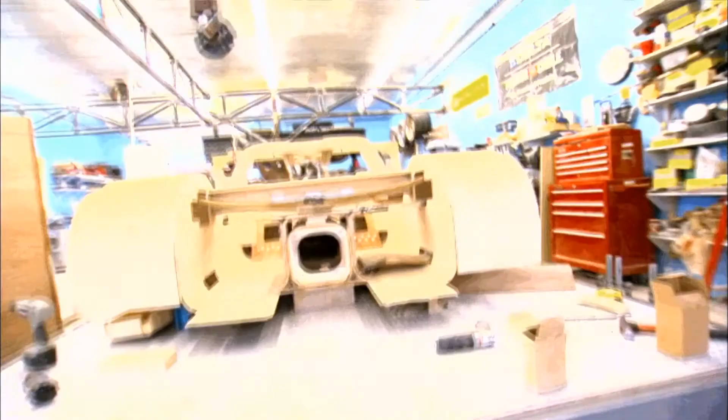In the future, you will commute to work at supersonic speeds, cruise around town in a mahogany sports car, and drive machines that will take you to new depths. Technology is pushing from every direction, getting faster with each passing second. Prepare yourself. The future is closer than you think.

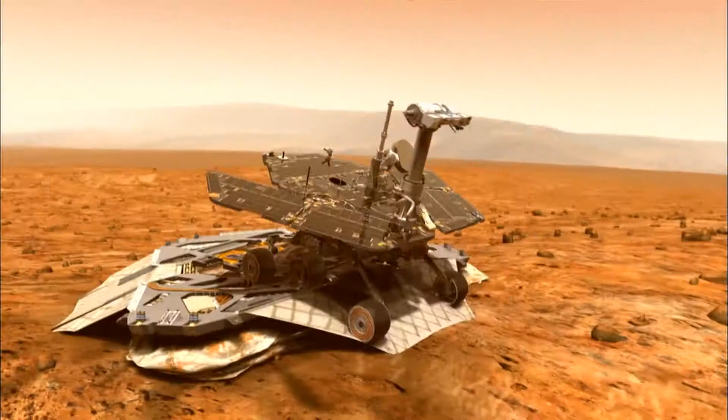The car hasn't really changed much in the past 80 years. It's basically a box on wheels. In the future, we're going to see a dramatic, revolutionary convergence of advanced technologies, nanotechnology, artificial intelligence, micro-sensor technology, the application of space age and digital technology, which will shake everything up concerning our car. Those revolutionary innovations will mean that cars will someday morph to suit our ever-changing needs.

Determining the shape of things to come begins with a simple question. Just what is a car anyway? Often referred to as the automobile. Automobile, like self-moving. With that definition, an elevator is automobile. I think a much better word, much more emotional one, is the word cars. If an automobile is what you use, a car is what you are.

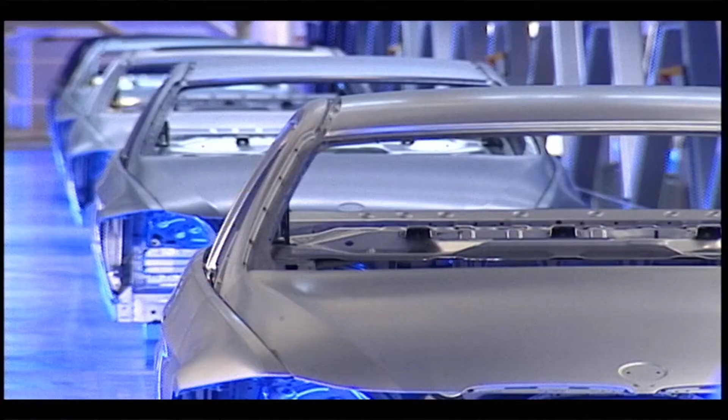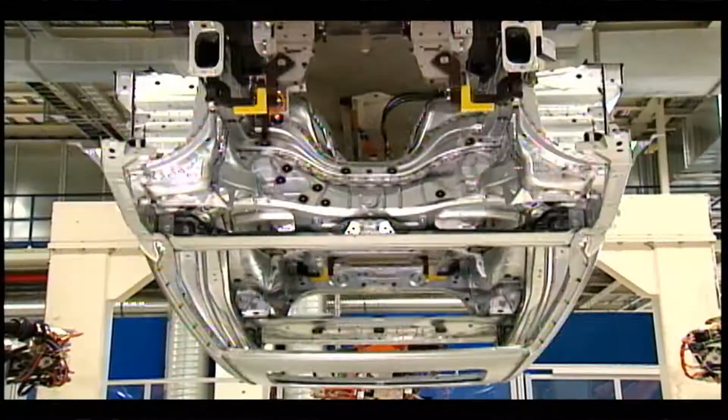If cars are who we are, then cars have defined us thus far as a box. Cars kind of all look the same. They're all boxes. To make sure that every one of those cars is perfect, you mill them out of huge blocks of steel and iron, and you make sure that they're put in machines that only put them together in an extremely, extremely precise manner. Design is really here to be a mediator between you and your world.

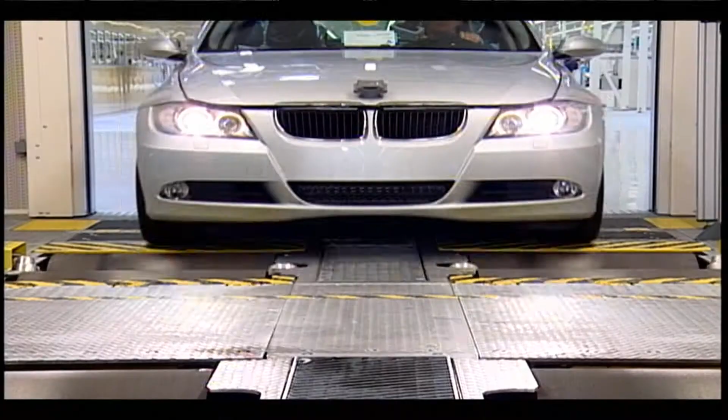But if people's expectations are things should look exactly like they did yesterday, then that's what they're going to look like. And with every new age comes new expectations. The question is, how will those new expectations reshape our automotive future?

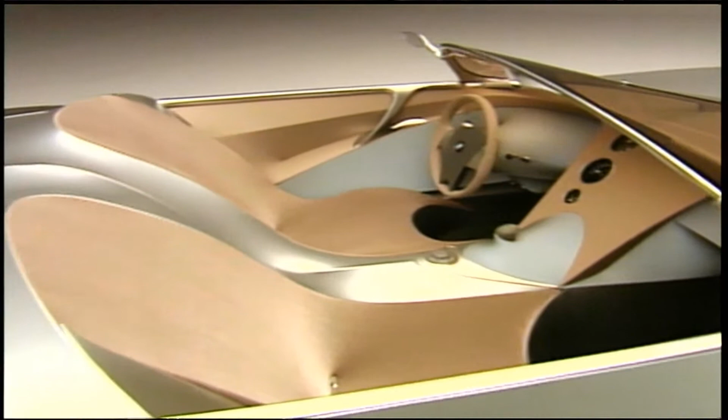Let me introduce you to Gina. This is a car we'd all like to meet. It's an aluminum space frame chassis that gives it these dimensions and these proportions of what really is a classic roadster. Aerodynamic, powerful, exotic, sleek, all the elements of a classic roadster. But how is this the car of the future? Gina's got something very special under the hood.

Instead of a car with a steel body or a carbon fiber body, we made this entire car out of a fabric skin, which is very stretchy. It can be put over all kinds of structure. And in fact, this structure right here is the substructure which protects you in a crash. And the skin takes a normal sports car and really makes it a sports car of the future.

So if we want to wake Gina up, I guess the first thing we have to do is ask Gina to open her eyes and wake up a bit, because that's really where the personality of a car comes through. Hello? There we go. And we get a little bit of light out of you. There we go. The light spills through underneath and shows you the structure, and also lets it have a little bit of an attitude.

Inspired by stretching a stocking over a wire clothes hanger, Chris Bangle has taken the concept of a beautiful car and expanded it beyond what most people can imagine. Gina itself isn't just about stretching cloth. It's about stretching your mind into a new idea framework to let you see the materials differently.

If today I need to take a lot of stuff to the dump, I need a lot of space in the back of the car, and the car has to change to adapt to that. But tomorrow I happen to be going with my wife to a party, and I would like the car to look as elegant as we are dressed. Can't the car change a bit more in that shape? Gina will usher in the age of morphing mobility. Imagine a car that changes shape to suit your every need.

Well, if cars really are an avatar for you, they reflect you on the outside to the rest of the world, then it only makes sense that as we change and evolve in how we are as people in this world and relate to one another, the cars have to change with us. Gina may be one of a kind, but with the introduction of the Gina concept, car design may never return to its original shape ever again.

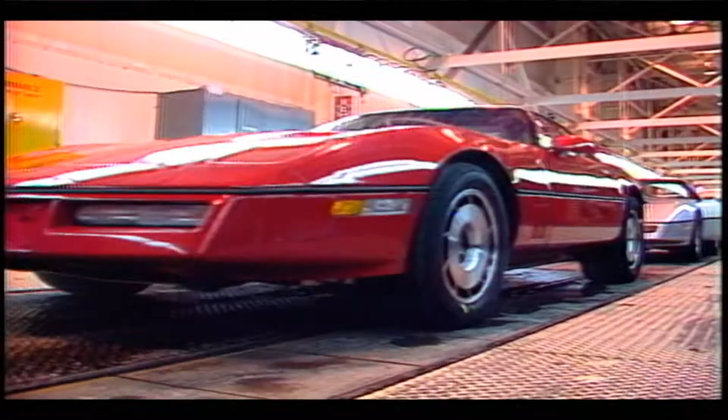The idea that every generation needs to find cars for themselves is quite clear in the historical sense. And then if you look forward in the future, the kind of demands that young people put on our generation are really high. And they expect a different world than the one that we're living in right now. And that's where I think car design has to change to match those expectations. And the morphing that Gina can do may be only the beginning.

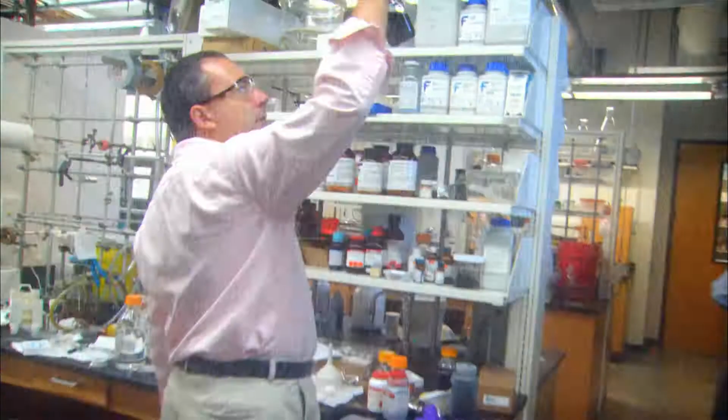Because forward-thinking scientists and designers are planning for a future in which cars can reshape themselves at the molecular level through the emerging science of nanotechnology. The magic of nanotechnology means that in the future, we may be able to grow things atom for atom. If you can control the migration of individual atoms, you can literally grow cars in your backyard.

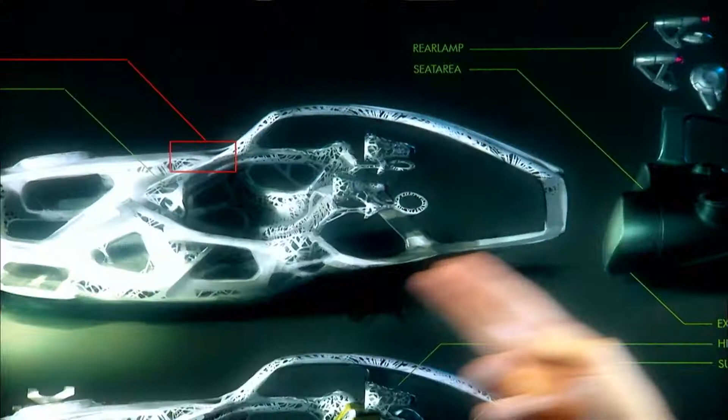By manipulating individual atoms and molecules, nanotechnologists will make cars that are vastly stronger, lighter, and infinitely more flexible. Cars like the Nano Spyder. Volkswagen designers think that one day they'll be able to program extremely tiny machines, none of them more than 0.5 millimeter in diameter, to assemble themselves into a car. These robots are creating a shape, a car. Like you're driving in a car, and it consists of a society of little nanorobots.

The connections between the nanobots could be changed on the fly, letting the car shift its shape as needed. It's like a morphing car. So the vehicle shape would begin to change based on the dynamics of the wind, based on the speed that we want to go, based on whether we're going up a hill or down a hill. And this is what we want to be able to do, much like a bird in flight, being able to change its shape. So in other words, instead of having a car that has a singular shape, the car shape can change.

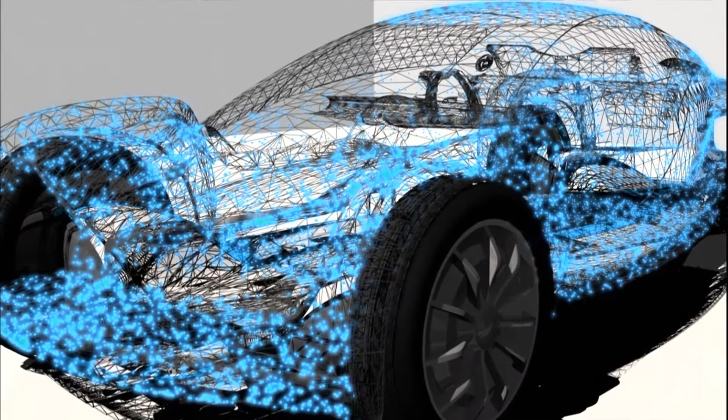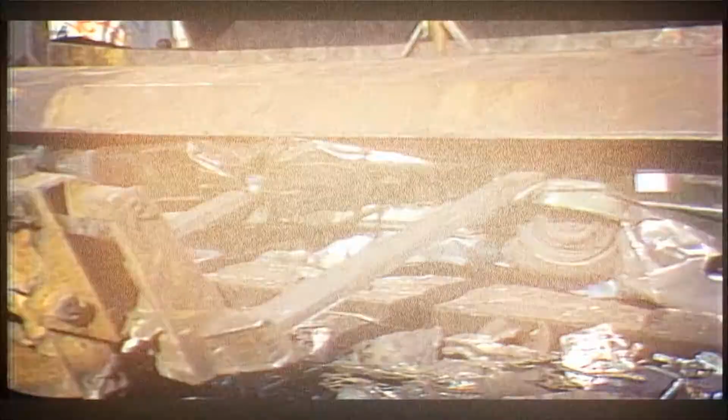Using tiny sensors, the nano devices could sense impending collisions and strengthen or weaken their connections accordingly, creating active crumple zones. And when the car has outlived its usefulness, no problem. It's like a new way of recycling things. It's not like creating a car and after time when you don't need it anymore, then crash it or melt it. You can use the same kind of material to create a different shape for different needs. Future cars will be able to redesign themselves on the fly.

Future roads may have speed limits, but future cars won't. That's because engineers are retooling cars from the inside out, building a new generation of speed demons that will leave even today's fastest cars in the dust. If you haven't seen the future, you haven't driven fast enough. This is the Koenigsegg, the fastest street-legal car on the planet. That's 245 miles per hour of handmade Swedish engineering. Brought to you by one visionary Swedish engineer, Christian von Koenigsegg. We build supercars for the future.

The secret of the Koenigsegg? A 900 horsepower twin supercharged engine, wrapped in an ultralight carbon fiber frame. That's what makes it go fast. But speed isn't only about raw power. Fast is not only top speed. Fast is about how the car operates as a total, meaning braking, acceleration, cornering, how everything interacts fast to make the package go fast around a circuit or on a bad road or in a straight line, in top speed, all at the same time. That's fast.

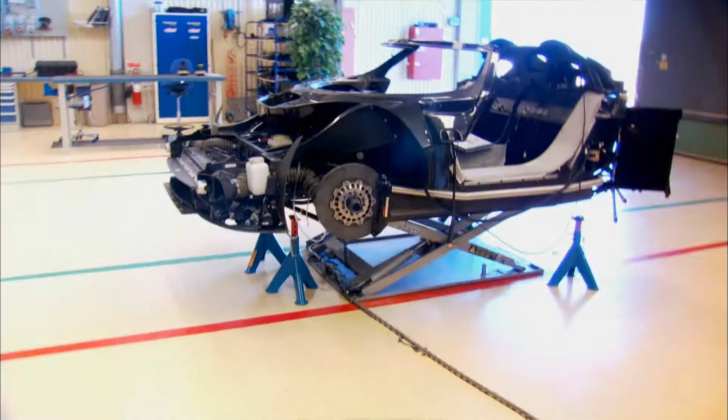With that in mind, Christian von Koenigsegg has hand-tooled every inch of the car to be as responsive as if it were part of your own body. And what a body it is. It makes you feel like Superman. It gives me feedback. It feels like I put my feet on the road and my hands on the wheels and on the brake disc, basically. I'm connected. Feeling that connected doesn't come cheap. The latest Koenigsegg sells for slightly over $1 million, and the wait list is about 2 years.

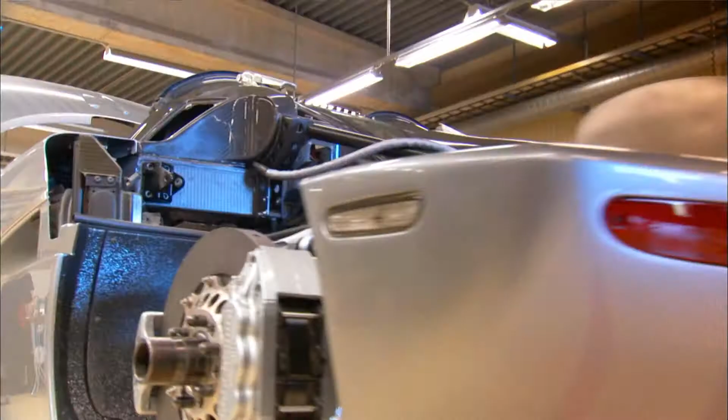But if you can wait a little longer, future models of the Koenigsegg will pretty much tie the car's controls right into your nervous system. Force feedback systems will further improve the tactile feeling and the connectivity to a car to make it more like an exoskeleton. There will be technology that monitors your eyes to see what they're looking at and molding seats to your body so you're always comfortable. Instead of having gears, you will be able to modulate torque and RPM with hand controls so you're always balancing on the tip of the maximum power.

The Koenigsegg will be able to handle anything the road can throw at it at blistering speeds. But if you really want to see the future of speed, you'll have to get off the roads altogether, because street legal is only part of the story.

In California's Mojave Desert, engineers and racers are busy building a future in which commutes will be measured in seconds, not hours. A future in which cars break the sound barrier regularly. This is the North American Eagle, and it's poised to become the fastest car on the face of the Earth.

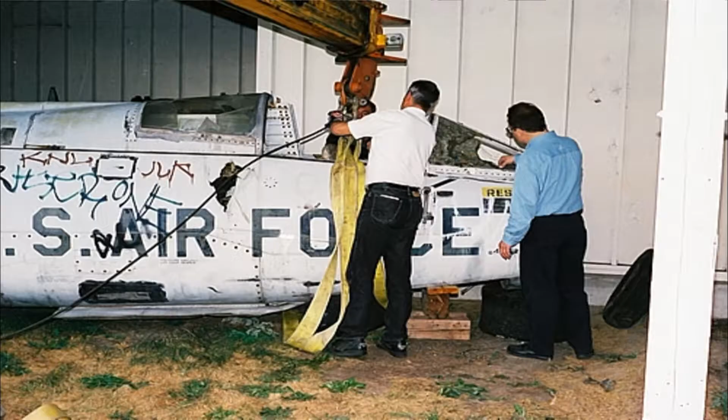It's a jet fighter on wheels, literally. We took this F-104 Starfighter, which is a Mach 2 fighter, and we clipped its wings. We actually removed the wings, removed the horizontal stabilizer, spent years rebuilding everything, because you can't just go out and buy these things. And we built this thing on a suspension so that we can actually drive it like a car.

Months away from being scrapped to make beer cans, it was a death-defying act to get the Eagle up to speed. But it seems the Eagle was destined to break the world land speed record of 763 miles per hour. That was the original tail number of this aircraft. 763 miles an hour represents the world land speed record. And this being 763, we figure there's probably some divine intervention there. In fact, Ed believes he can go well beyond 800 miles per hour in his supersonic car.

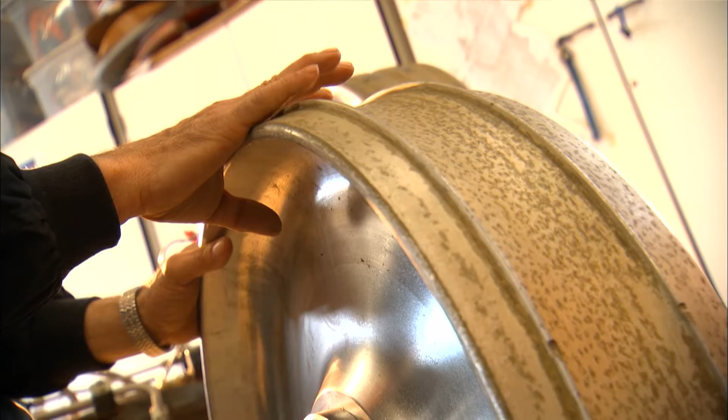At speeds like that, ordinary rubber tires would melt like butter, and most metals would buckle. So Ed and his team reinvented the wheel. It's a special aerospace grade of aluminum, because when you spin these things up to like 15,000 RPMs, they practically turn into potato chips, the way they warp. So the design had to be really thought through. I mean, who else has built wheels out there that are capable of turning at 900 miles an hour? Well, I think we're about the first ones.

And melting wheels aren't the only concern. Traveling at supersonic speeds involves breaking the sound barrier, and this creates a shockwave. A shockwave in the air is nothing to worry about, but a shockwave on the ground, it creates lift. And if you're not careful, next thing you know, you're flying this airplane instead of driving this airplane. It's a very delicate dance all the way down the track. But the biggest technical challenge of supersonic ground travel isn't going fast. It's stopping.

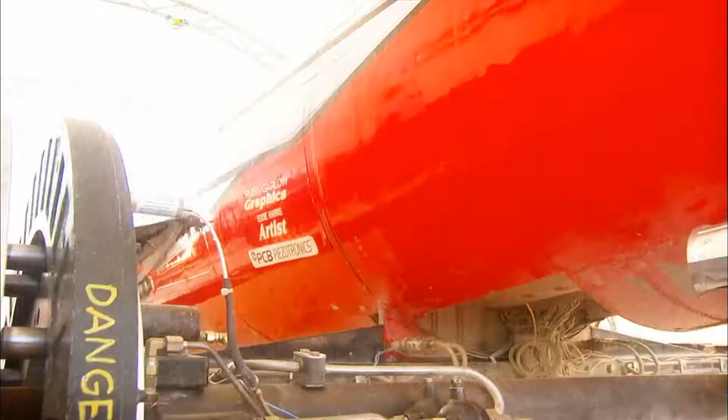Since ordinary brakes would be shredded at these speeds, Ed's team developed a one-of-a-kind set of magnetic brakes. Made up of two large metal plates in the wheel assembly, each aligned with 27 rare earth permanent magnets. Hydraulic systems push the magnetic brake plates together, creating eddy currents in the aluminum and generating enough resistance to stop a jet fighter in mid-flight.

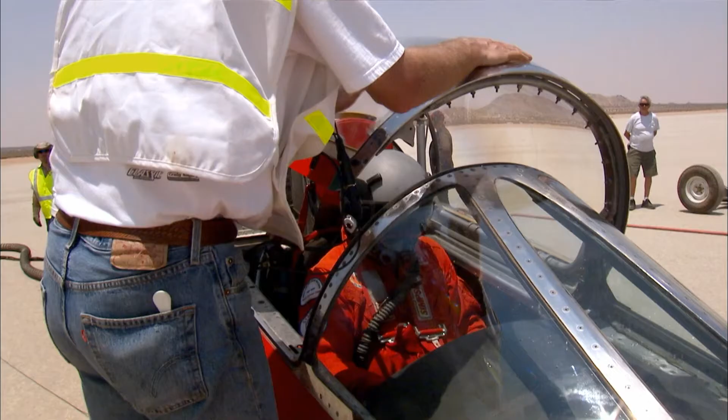And just like space program technologies have become part of our everyday lives, Ed Shadle believes the inauguration of the rocket car will one day supercharge your daily commute. One of the futures of the automobile that could be answered through a project like this is getting people to work. Now, if you look at the new hot lanes that they just opened up between Tacoma and Seattle, you have to pay to go into the left lane so you can scurry along faster than everyone else.

What if that was a track that you move your vehicle onto and it's levitated through our magnetic processes that we've developed here, and they're scooted along at 700, 800, 900 miles an hour, and they get to Seattle in a blink. Wouldn't that be great? That's the kind of future that can come from technologies that we develop in projects like this.

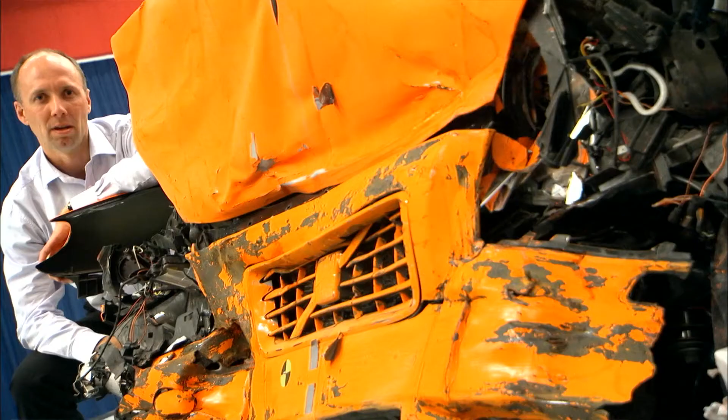Future cars will go really fast. Does that mean future car wrecks will be really bad? Not necessarily. In the future, crashes will be a thing of the past. No more crashes, ever? That's a long way from where we are today. There are more than 1.2 million people getting killed in road traffic accidents each year. And that's just the tip of the iceberg. In fact, traffic accidents are globally the leading cause of death among young people aged 10 to 24 years old.

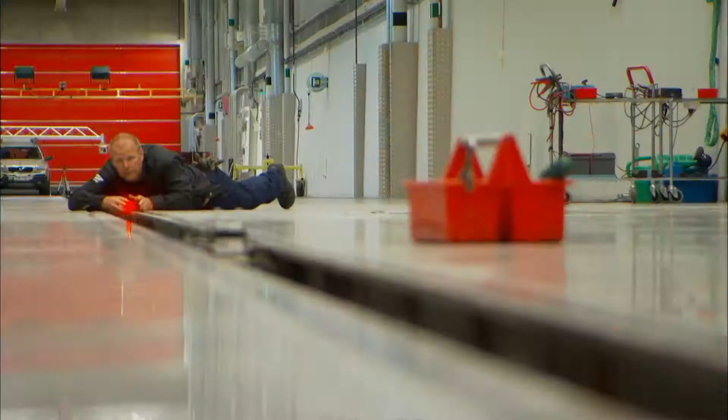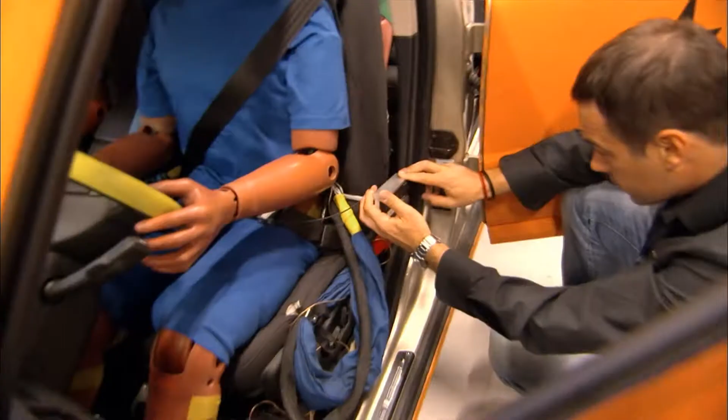It's not a problem, it's epidemic. The cure for the epidemic is being developed in the labs of Volvo. It was here that the three-point seatbelt was created. And it's here that new concepts for a crash-proof future are being hatched. We take safety very seriously. Their newest model is designed to be virtually death-proof. Creating a car like that starts with analyzing the real-world physics of collisions.

Meet Mr. and Mrs. Bengtsson. Lars, who's doing the driving today, has been working hard all week. Meet Lars and Anna, a newlywed couple. While the couple are arguing about what route to take, the driver takes a moment to look down at the map, not realizing that he's starting to drift into the opposite lane.

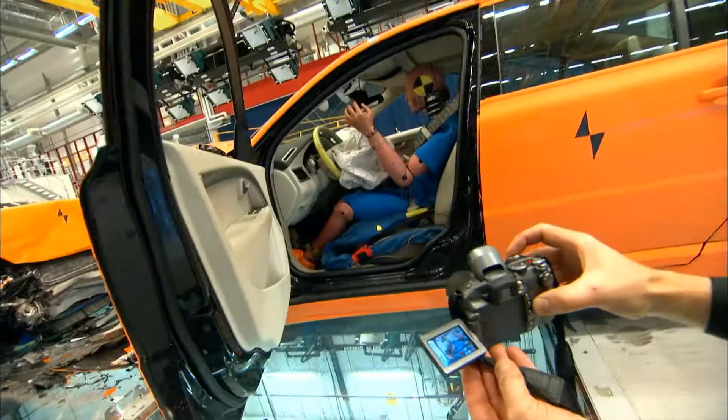In the other car, Clive is listening to his family, drifting off in his mind, not realizing the car coming straight towards him. By playing out thousands of realistic scenarios, engineers are able to constantly refine airbag responsiveness, frame design, and other components of the death-proof car.

Looking up from the map, the couple realize that they're in the wrong lane. At the same moment, Clive looks up and he starts to apply the brakes, but it's too late. These scenarios have helped Volvo build ultra-safe cars, but they're not resting on their laurels. Their vision? A future where crashing is not just survivable, but impossible.

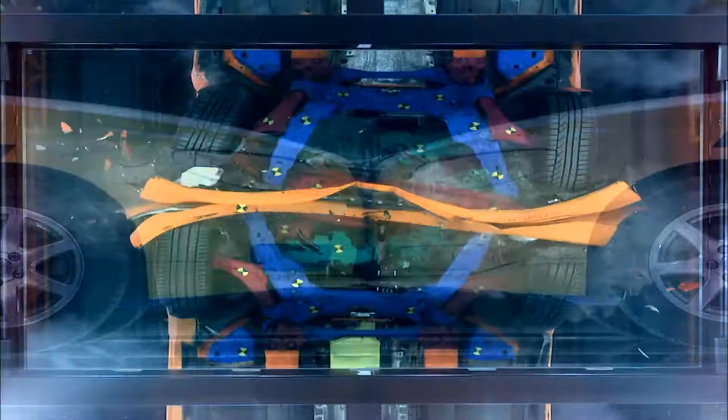This is my car, and I really like it. In the crash-free future, thanks to auto brake systems, I don't have to worry about it getting damaged. To make a car that won't let itself crash, you have to give it senses. We gave this car eyes. Here we have a laser radar, which transmits laser beams in front of the car, and here's a receiver. Based on this information, we can calculate the closing velocity to objects in front of the car.

And you have to give the car reflexes. If you're about to crash, your car will take the wheel. If a collision is imminent and the driver does not take appropriate action, we can automatically brake the car and completely avoid the collision. Using its radar eyes to spot dangers and auto braking and auto steering to avoid them, this is one car that won't crash, even if you want it to.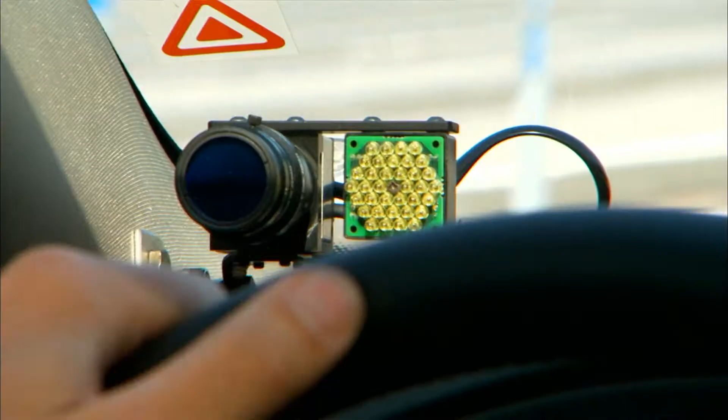But the real goal is to create a car that works with you to avoid collisions. So we can monitor what's outside the car. We can also monitor how the car is being used. This kind of research can help us in the future to actually get inside the driver's head. Using software which monitors and tracks your eye movements, head position, and reaction time, they're building a future car that will compensate for your bad driving habits.

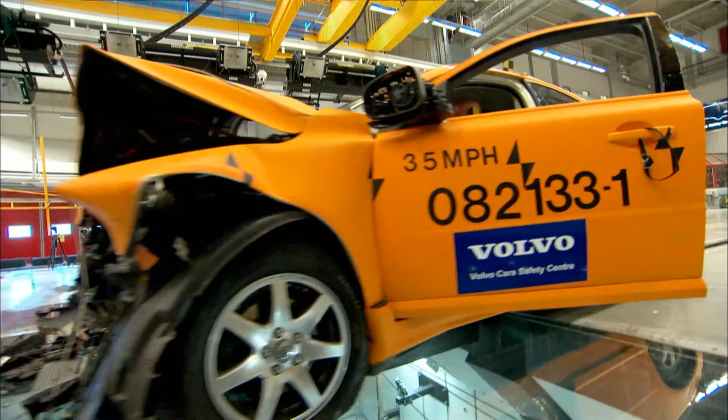It will know when you're distracted, when you're overreacting, when you're nervous, and when you're angry. It will know you better than you know yourself. Studying people is by far the most important thing for us now, and we are involved in a number of different projects in order to build this knowledge. But studying people is only the beginning of Volvo's research. It turns out that the real secret of a crash-free future may be a car that is less like a person and more like a grasshopper.

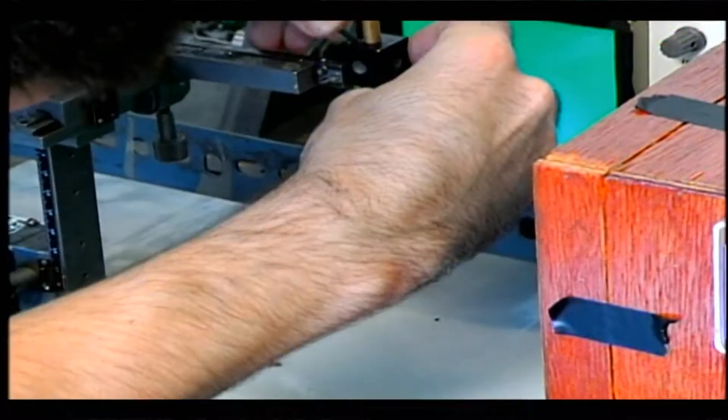We took the grasshopper, we put it in a harness just before a video screen, and on that video screen we would show it sequences that look like near collisions. Researchers noticed that grasshoppers travel in swarms of millions, separated from each other by fractions of inches, but never collide. If cars could do that, the benefits would be huge. You can think of a swarm of cars that are moving really closely on the highway, and then you have a greater capacity on the same highway, which will reduce congestion.

Now we discovered that when a grasshopper is about to have a collision, its nervous system will almost immediately take action. For instance, when it is almost about to have a collision on the left, its wings will start to compensate so that it moves to the right side. The grasshopper's nervous system is made up of highly specialized clusters of nerve cells in various parts of its body. This enables the grasshopper to detect threats and make adjustments in fractions of a second.

The main reason this system is so efficient? Grasshoppers don't really have a brain. They do have brains, of course, but only tiny, rudimentary ones. Nerve signals don't waste time by going through a central processing unit like a brain. And that's what makes a grasshopper so incredibly efficient in swarms of erratic traffic. It is, in essence, a driverless vehicle.

And the same systems will let future cars travel quickly and safely, even when packed within inches of one another. I hope that we will see a swarm of cars going closer, faster, and safer. When you drive closer, the wind drag is lower, which will reduce power consumption, and that's good for the environment. Swarms of cars on future superhighways sounds like a smart idea.

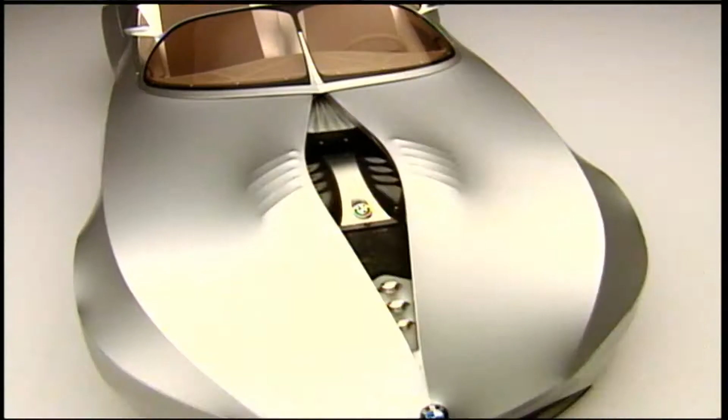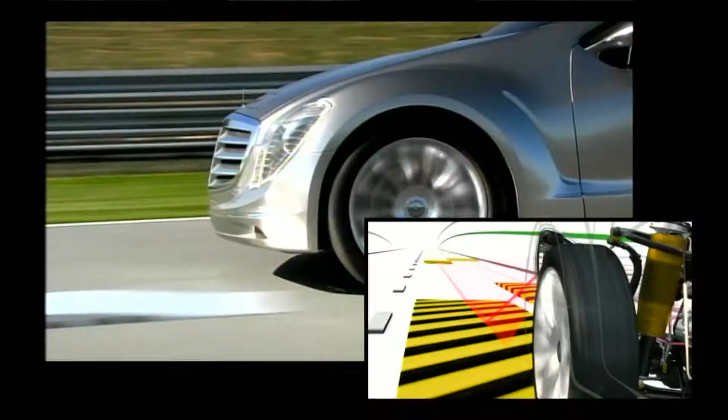It's easy to imagine supercars of tomorrow that tear down the highway, look more like rocket ships than cars, and are tricked out with every possible luxury. But the future may in fact be a whole lot simpler than that. Simpler and smarter. Like all technology, we rely on our cars to be smart. In the future, we'll ask them to be even smarter. Actually, we may not look at them as cars at all, but rather as artificial intelligence on wheels.

Door open. Watch your step, please. Step inside the Pivo, and you'll be greeted by your own robotic driving companion. Hello, my name is Pivo. A friendly co-pilot who's intelligent and helpful. Is there any parking lot here? 100 yards on the right and 200 yards on the left. The left one is cheaper. Trying to create a really new relationship between human being and the car. It's really a car of the future.

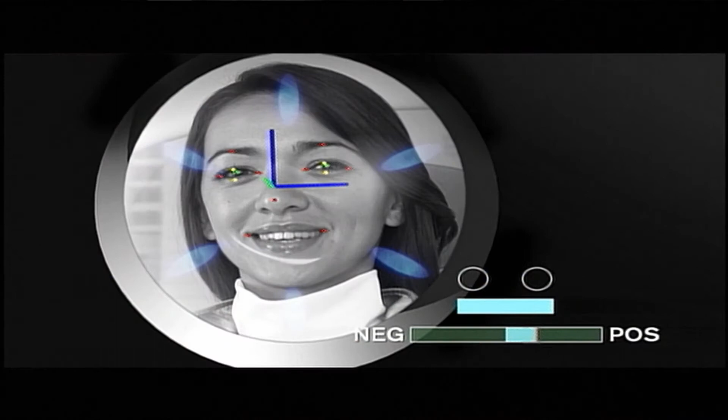Pivo is the creation of Masato Inoue and his colleagues at Nissan, who have decided that the future is not only about supercars, but friendly robotic cars as well. Nice to meet you. This robotic agent has two cameras in the eyes, like a human being. The car's interior cameras track and analyze your every facial expression, so Pivo knows your moods. Aren't you sleepy? You've been driving quite long. There's a coffee shop 500 yards ahead.

And Pivo's smarts don't stop with the onboard robot. The car's overall design is ingenious as well. Pivo has large doors for easy access to the cabin, and large windscreens and windows for high visibility. And in case there are any lingering blind spots, cameras mounted all around the body bring you complete 360-degree vision.

And Pivo doesn't just see in every direction, it rotates in every direction. And this will change driving as we know it. There will be a 360-degree rotating cabin resting on its four-wheel chassis. And because all four wheels can rotate 90 degrees, parallel parking will never be a problem again. And the driver will always be able to exit the car curbside. With its huge windows and multiple cameras, Pivo is all about visibility and transparency, a car that keeps you feeling connected to the outside world.

But what if the smart car of the future replaced your windshield with a computer screen? That's the audacious concept behind Stéphane Aubarbier's Assystem City Car. As its name suggests, the city car is built for urban living, with a lightweight frame and an unusual diamond-shaped wheel placement that make it ideal for nimble movement in tight spaces. But the car's most radical concept is inside. Switch the city car into smart mode, and a digital display is pulled across the windshield, meaning you can't see out the window at all.

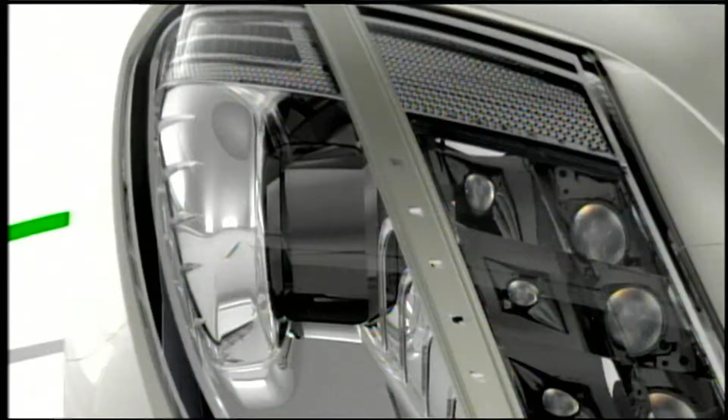The city car's cameras and sensors could make your ride smarter and safer, and similar technologies could make your ride a whole lot smoother. With high-end automobiles, luxury is everything, and future luxury innovations will ensure that the glass remains half full. The engineers at Mercedes are developing a way to literally smooth out the bumps in the road via a system called pre-scan. We are smoothing out the road completely.

Infrared laser beams scan the road 10 yards ahead of the car, searching for potholes, debris, or any kind of bumps. Based on what the lasers see, the system then tells the suspension to relax or brace itself for what's coming. The result? A steady ride under just about any conditions. Leave a water glass on the roof and not a drop will spill. Mercedes engineers call it the magic carpet ride.

With radar sensors, with the camera sensors, we are expanding the width and the depth of what we can see or perceive. The most excitement would be that I drive the way I want to, with all the pleasure I can get, but I want to be sure that all these sensors take care of me. Your future ride will be super smart and super smooth.

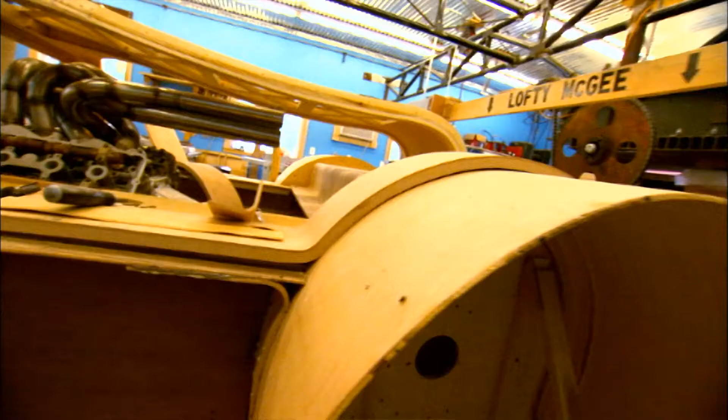Could the future of automotive breakthroughs come from biodegradable and naturally renewable resources, like wood? Joe Harmon thinks so. His creation is a 700 horsepower supercar built almost entirely out of wood composites. Wood has incredible performance capabilities. It has a higher strength to weight ratio than aluminum or steel, and you can use it in composite form, much like carbon fiber or fiberglass. When you look at it that way, you kind of ask yourself, why wouldn't you make it out of wood? The real question is, how?

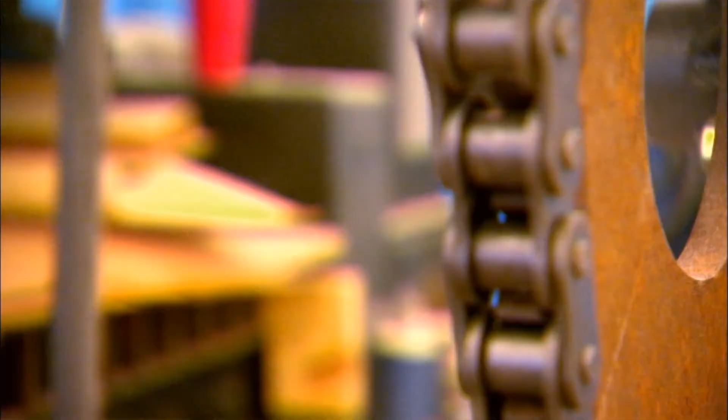Virtually everything on the car, other than the engine and transmission, starts as this. This is a sheet of veneer that's very typical for what we use. Wood is a directional material, so it has a lot of strength in this direction, but not much strength in this direction. So typically, we rotate each layer 90 degrees to balance that strength out. The Splinter Car's production team glues tens of thousands of these wafer-thin slices of veneer together into custom-molded car parts. When finally assembled, wood will make up more than 90% of this hot rod, even the wheels.

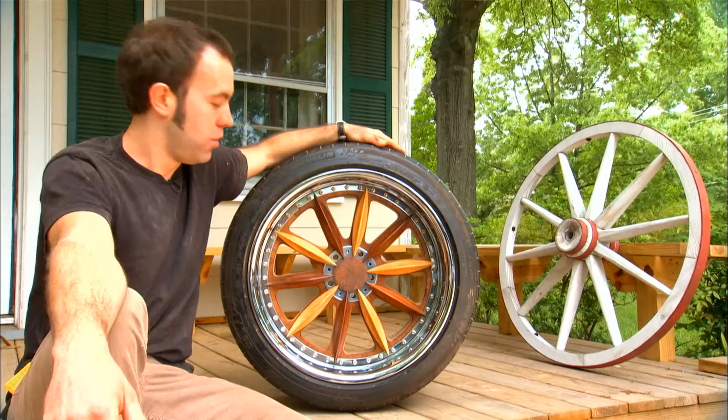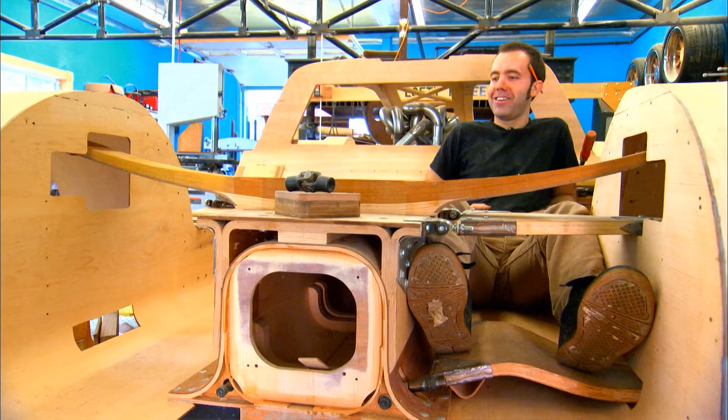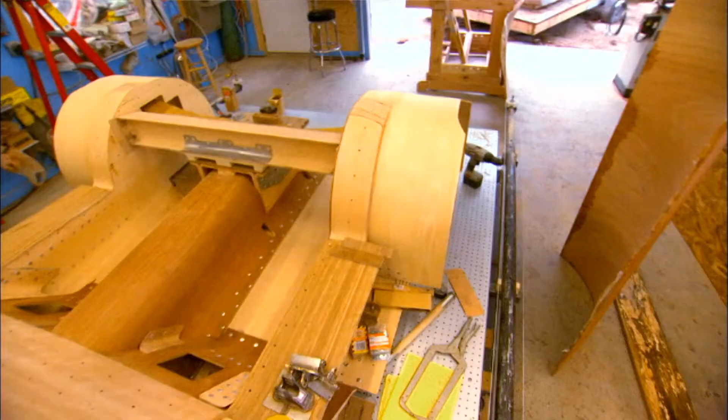We've reinvented the wheel. It's made out of 32 layers of rotary cut oak veneer. We tested one of the spokes and it took 6,000 pounds to break it. And it also comes with handcrafted seats. I took a basket weaving class to learn how to weave the seats for this car, and that was a very emasculating experience. Emasculation aside, Joe is very confident in what they're creating. We named it the Splinter to kind of poke fun at the people. Everybody told us it was going to break apart. Actually, Splinter is quite durable and uses innovative design to overcome some obvious challenges.

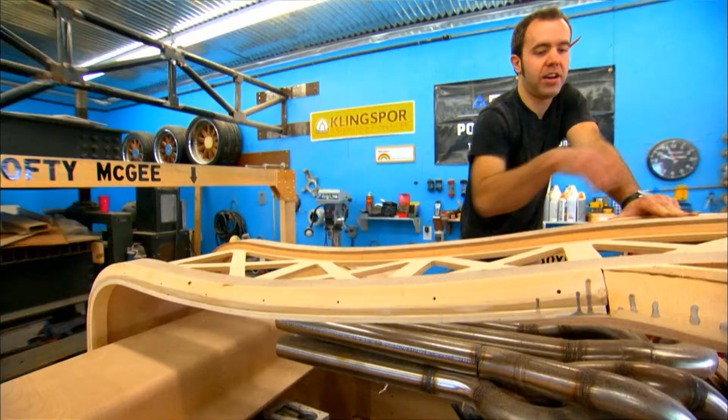700 horsepower makes a lot of heat, so by bringing the exhaust out of the top, we can duct cool air in much easier to keep the engine bay temperatures down to keep from catching our wood on fire. Faced with a future of diminishing resources, a car that is mostly organic makes a lot of sense. One of the biggest benefits to wood is that it takes very little energy to produce a piece of plywood when you compare that to aluminum, steel, or carbon fiber especially. And it's not an oil, petroleum-dependent material. It's a naturally renewable, sustainable, biodegradable material.

The Splinter car could very well mean an end to junkyards, and it points to a new era in car design and manufacturing. I could see in the future a flat-packed IKEA-type car being shipped to your doorstep that you could assemble yourself. Whether it's a future where we chop down a tree from the backyard or pick up a kit car from the local model shop, there's no doubt that Joe and his team can see the forest through the trees. Using a material that's so far away from the norm, it leads you in different directions. We wanted to take it to the extreme. We've definitely heard a lot of people say that it's not going to work, and we look forward to proving them wrong. That's what innovators do. They go against the grain and charge full steam into the future, sometimes with a great deal of eccentricity.

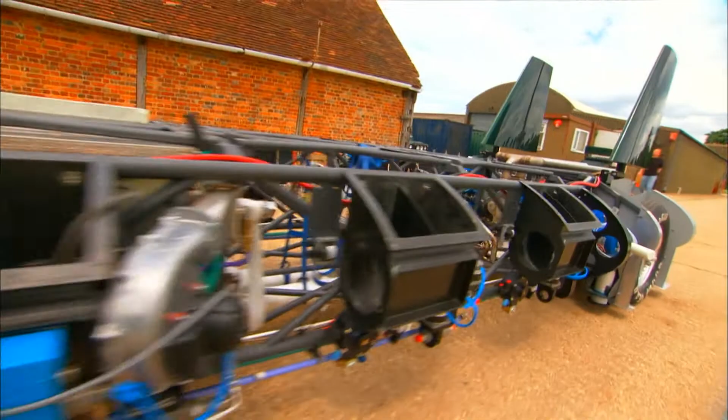This isn't your grandfather's steam car. This is Inspiration, a British car built to reach record-breaking speeds, and it's powered by a source as old as the Industrial Revolution. At the turn of the century, steam was a viable alternative with electric and gasoline internal combustion engine cars. In fact, steam never left us. High-pressure, superheated steam is responsible for much of the world's electricity.

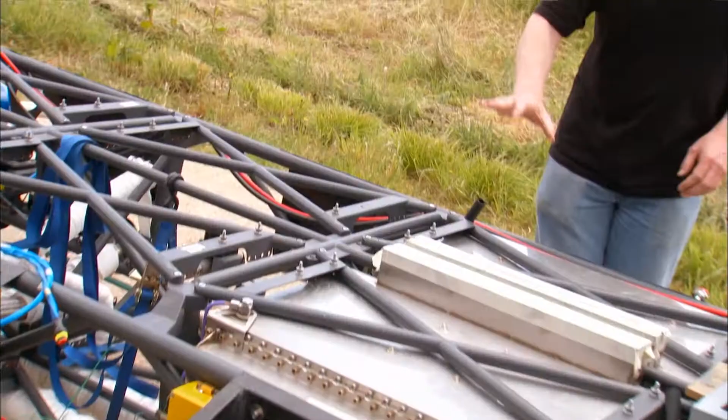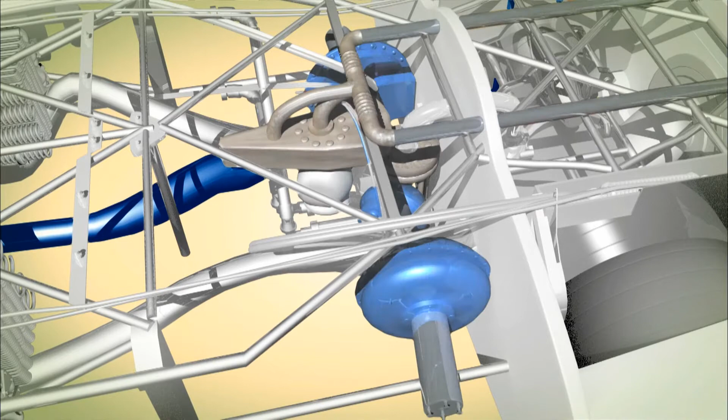Inspiration's heart is its boilers. Matt and his team have managed to compress the power of a locomotive into a small portable boiler. 12 of these propane boilers use heat and pressure to rapidly vaporize water into steam. The steam then hits a turbine engine, driving it up to 12,000 RPMs.

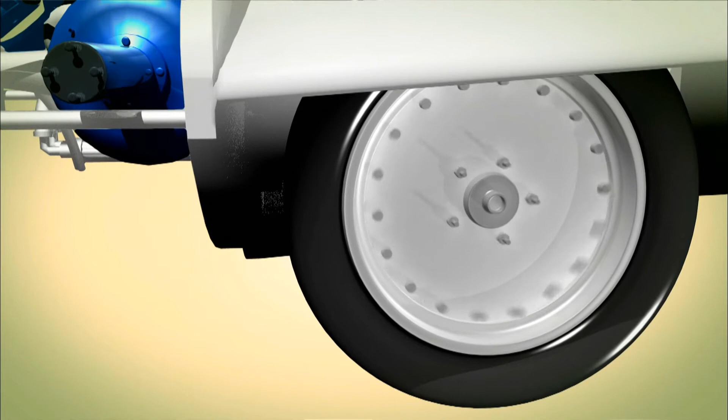The result? A supercar that Matt Candy thinks can break the steam car speed record, which has stood for more than a century. It was a version of a Stanley steamer that holds the recognised world record set in 1906 of 127 miles an hour. That's the record that we're hoping to beat.

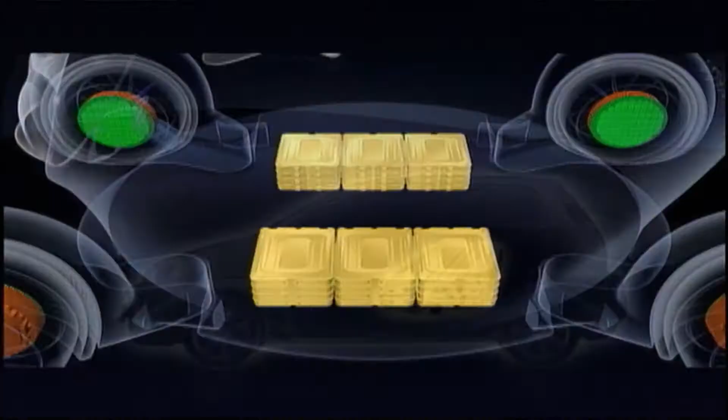Even if they're bursting a few boilers along the way, it's not going to stop Matt from his mission, because he believes steam will be a critical component in future hybrid cars. Someday we'll see cars that have several engines or power sources built right alongside one another. Steam as a means of getting every last drop of heat from the combustion that's taken place as a part of the whole, it does have a future.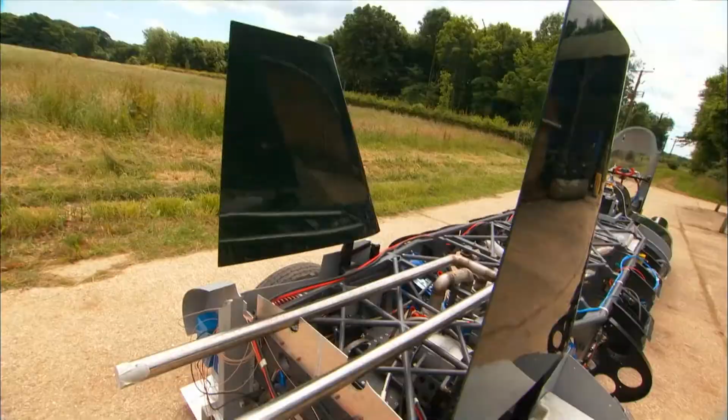For the British, boiling hot water is no doubt a national obsession. But pumping out the equivalent of 9,000 cups of tea a minute is a bit over the top. It has all the elements of some crazy, eccentric British inventiveness, but the technology that we're bringing to it is new and it's not been done before. From the very beginning, cars have been a symbol of our independence. The cars of the future will give us more independence than we ever thought possible.

I don't need roads. Frank Rinderknecht doesn't even need land for that matter. The Scuba has everything you'd want from a futuristic vehicle. Sports car fast, stylish, eco-friendly, with a laser camera mounted up front. It can even drive itself. But with the push of a button, this car goes where no other has gone before. We are the first guys to build a car which can dive. Probably the most astonishing fact is that we dive in the open, which means that people get wet.

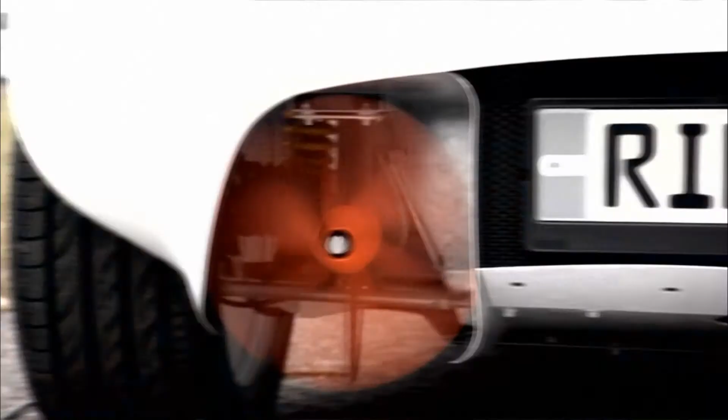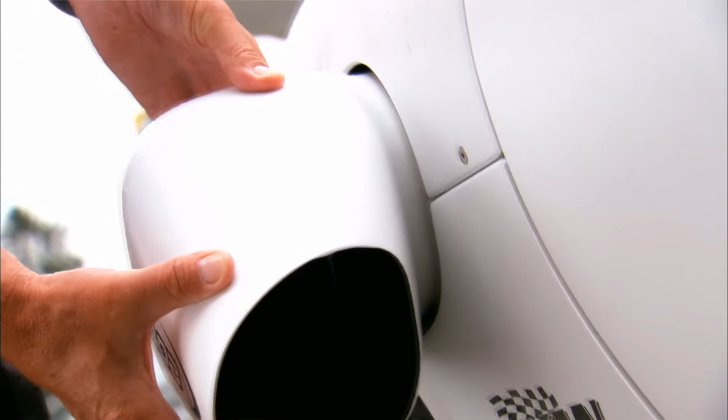Thanks to a built-in dive system, this convertible submarine concept will keep you close to the coral reefs and provide an easy escape route should your oxygen run low. Powered by propellers on the surface and water jets down below, the Scuba handles as well underwater as it does above it. The two water jets can be rotated to adjust the going up and the diving under. This water intake guides the water to the two water jets on the left and on the right side. The water jets shoot out the water on the side and propel the car once it's underneath the surface.

And Scuba has an environmental consciousness in every environment it travels. The Scuba is fully electric. It was very important for us to be zero emission. The Scuba will open up a whole new world of possibilities for our future. A diving-able car could be used for transportation for new habitats under the sea level. Discovering new places is a passion for some drivers. For others, getting lost is a much more attractive proposition.

Thanks to the new Jeep Renegade concept car, we will soon be able to disappear into the wild without a trace. This vehicle opens up entirely new avenues that let the driver and the occupants literally go more places and do more than they're able to today. The Renegade is designed to leave all other off-road vehicles in the dust. Its mission is to go anywhere and stay there for a very long time.

The electric engine's present range of 400 miles could get you across the Mojave Desert. But the sky's the limit, thanks to a unique set of power-generating wheels. At the same time as it's using energy to get me up the hill, it's recharging itself coming down the hill.

From new frontiers to the final frontier, vehicles of the future will take us to habitats in the furthest reaches of the solar system. The Lunar Chariot is paving the way to our future in outer space, and plowing it, and drilling it, and digging it. If we're going to develop the moon and other planets, this construction vehicle will build everything, from landing strips to space stations. America makes some pretty tough trucks. We all know that. But this truck, it's different, and it is tough.

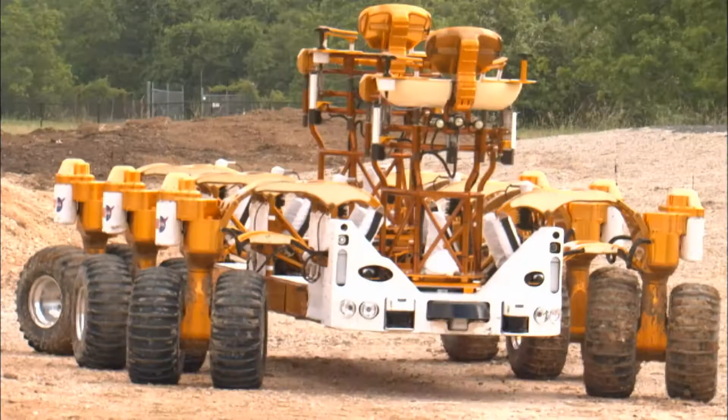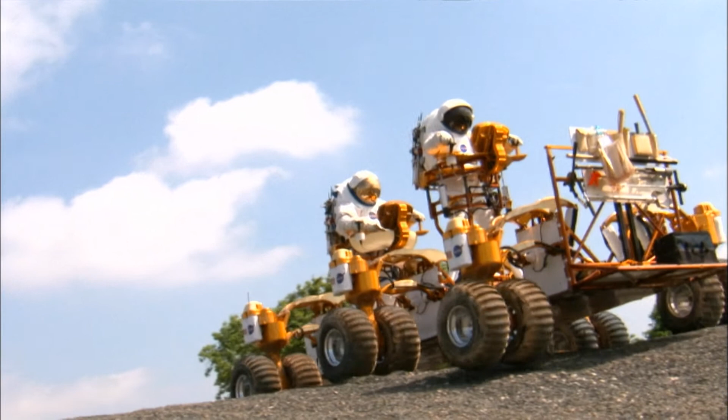Chariot will get on a rocket, go to the moon, and then it'll be going through terrain that is enormously harsh. At the extremes, the lunar surface is anywhere from minus 270 degrees Fahrenheit to plus 270 degrees Fahrenheit. The Chariot is not only built to withstand anything the solar system can throw at it, but it actually hungers and feeds off of these extremes. If one part of the vehicle is pointing towards the sun, we'll take the heat from that part of the vehicle and move it to parts of the vehicle that are in the shade.

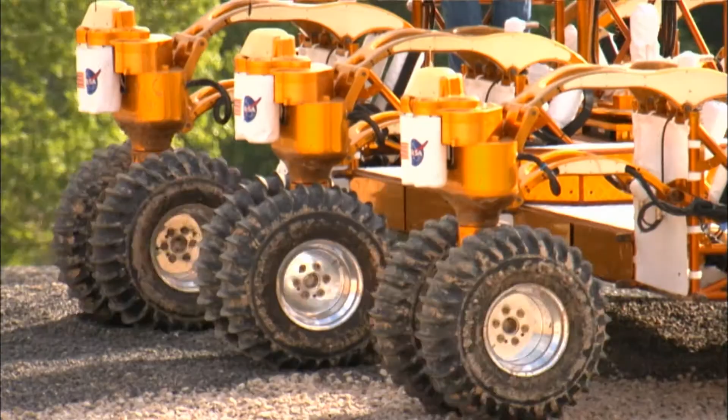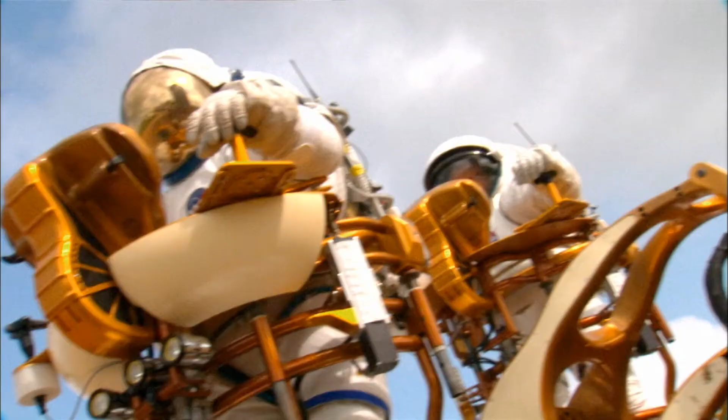To ensure its mobility, the Lunar Chariot is built like a crab, with 6 independently controlled legs and 12 independently moving wheels. It won't get stuck, because getting stuck is not an option. If you're going through an area where you get stuck, you can pick each wheel module up, point them in an opposing direction, and you just drive right out. Cornering in moon craters with spacesuits is a bit different from circling the track at Indianapolis. Astronauts need a different kind of mobility.

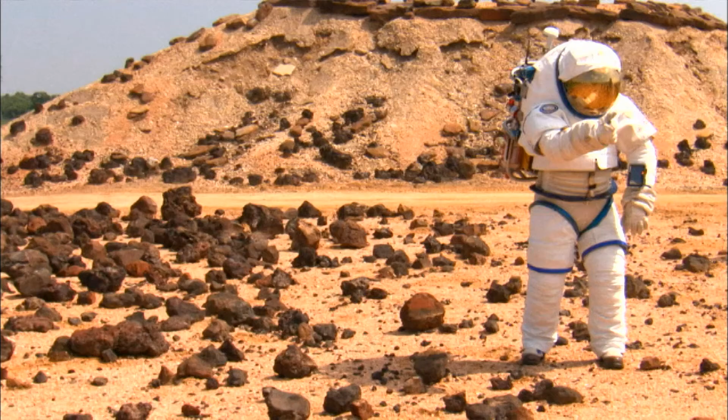When you're in a suit, you can only see forward. It's hard to turn your head, so you can't really see behind you. So he came up with the idea to put the astronaut on a turret so the astronaut could see all sides of their vehicle. The handling ability of the truck is not only a function of who's driving. In many instances, the Chariot won't have a driver at all. At least, not behind the wheel. The lunar truck has 3 modes of operation. It can be operated on board, it can be operated locally off board, and then it can be operated remotely from a long distance, say from Earth to the lunar surface.

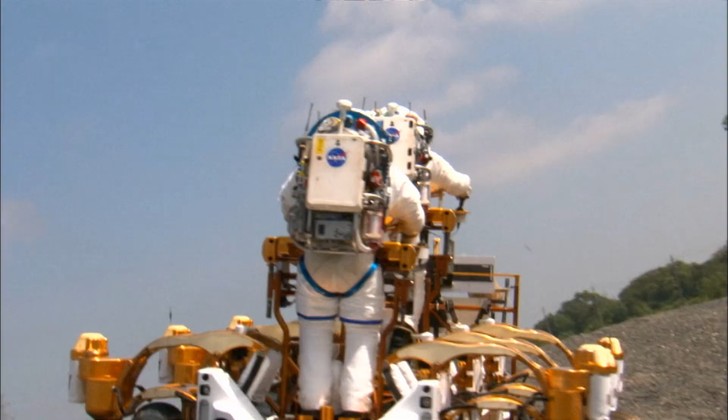The lunar Chariot is not something we'll see at a nearby construction site. At a cost of $2 million, it promises to boldly build where no truck has built before. It's Moon, Mars, and beyond. We are taking the baby steps right now, and the lunar truck is just one of those steps to get to a point where we're using Mars as a habitat, and then after Mars, it's planets outside of our solar system. You never know where we're going with this, but you know that we're going in the right direction.

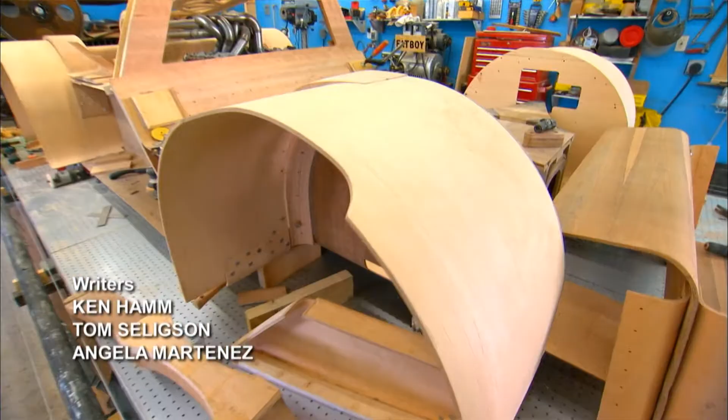When kids of today dream about getting their licenses, future cars are what they'll dream about. Cars powered by electricity and steam. They'll drive without fear, surrounded by sensors and super strong materials. They'll climb into cars that defy conventional limits. And climb into cars that will do the driving for them. These are the cars of the future.